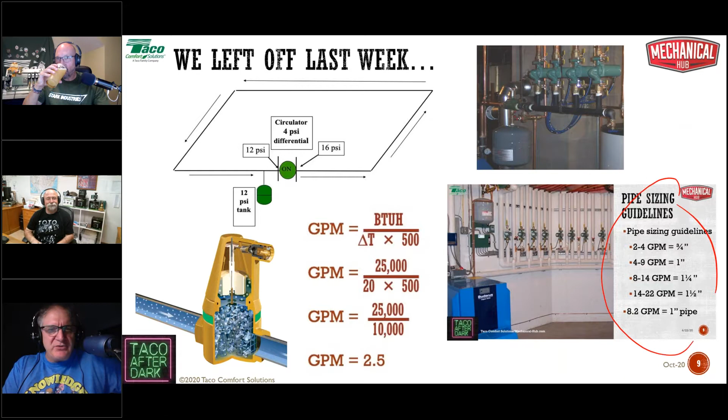So that's where we left off last week. Tonight we're going to start down the journey of circulator selection. A lot of folks look at this and say, well, I just use a 3-speed. Okay great, what speed do you usually set it at? Well, I usually set it to high, contractor no-callback mode. Well then you don't have a 3-speed pump - you're putting the biggest possible pump you can within that selection, and it may quote unquote work, meaning people aren't freezing to death, but there's a whole boatload of other things going on here.

So those are the things we're going to talk about tonight. We're going to talk about different types of circulators. We're also going to start the discussion that continues into the next couple weeks about variable speed circulators. I've heard the story: don't worry about circulators, just throw a variable speed in there, it'll be fine, these things are magic, these things take the thinking out of it. Well, we're going to poke a few holes into that hornet's nest as well next week.

So let's get started on circulator selection and the whole thing about pump curves, shall we? First things first, we call these things pumps, right? Everybody calls them a pump. We're a pump manufacturer, we're a pump company, these things are pumps, we need a pump, what's the right pump, blah blah blah. Well, we're going to use that word because it's easy and convenient and we're used to it, but it's not a pump, it's a circulator, and there's a difference.

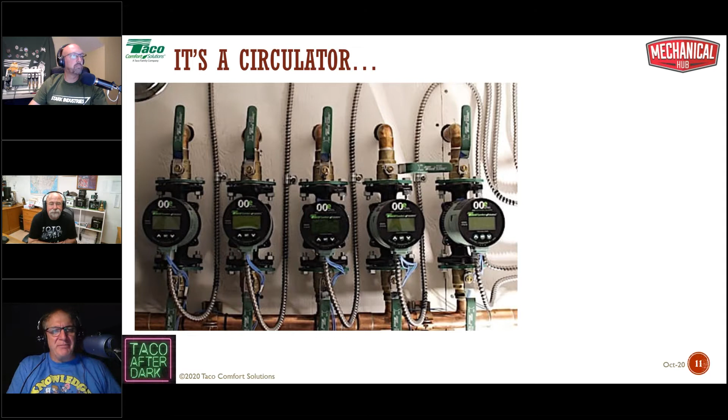Now a pump is more like a well pump, right? We are lifting water up out of the well into a pressurized tank. A circulator actually does a lot less work - a circulator doesn't pump, a circulator circulates, right? So it's not a pump, it's a circulator. In fact, maybe a better name for it would be to call it a pressure differential machine - its job is to create a pressure differential within the system, and then Mother Nature takes over. High pressure goes to low pressure. The trick is we need to get a circulator that creates enough of a pressure differential to create enough flow.

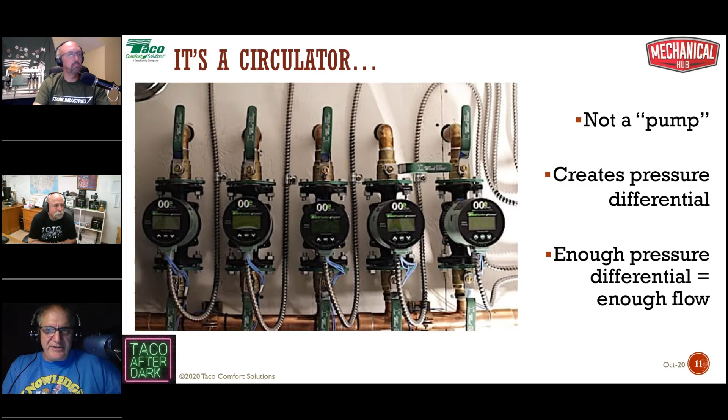To deliver the BTUs we need under design conditions. Remember that flow is GPM: GPM equals BTUH divided by delta T times 500. It starts to come together a little bit. So we need a circulator that's big enough without being ridiculously oversized. All right, so that's the challenge that we face.

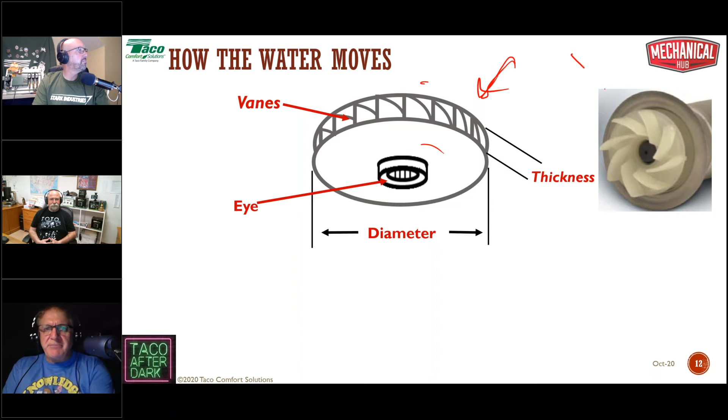How does the water move? How does one of these things work? Well, you've got the circulator, the gazinta side and the gazouta side, and inside that volute casing is this thing, an impeller. There's an artist's rendition of a closed vaned impeller right here because there's plastic on both sides. And over here is a picture of a standard efficiency 007 impeller, which is an open-faced or open-vaned impeller. They have different jobs, they do different things, but they work in essentially the same way.

The water is going to enter the impeller through the eye. It comes in the gazinta side, and there's a hump on the volute. What happens is that hump redirects the water 90 degrees, so it enters the eye of the impeller. Now this impeller is spinning at a certain RPM, and the water enters the eye.

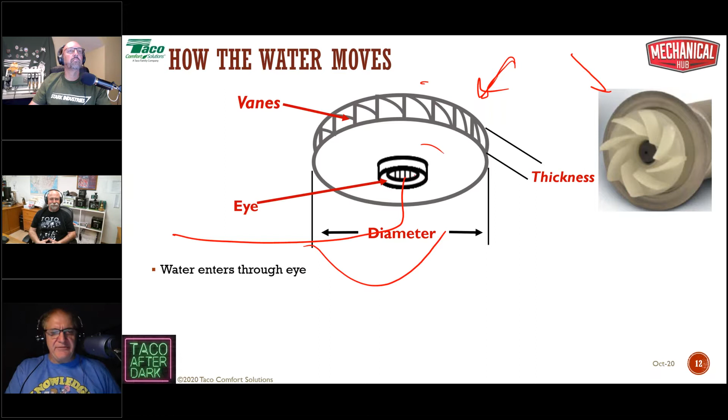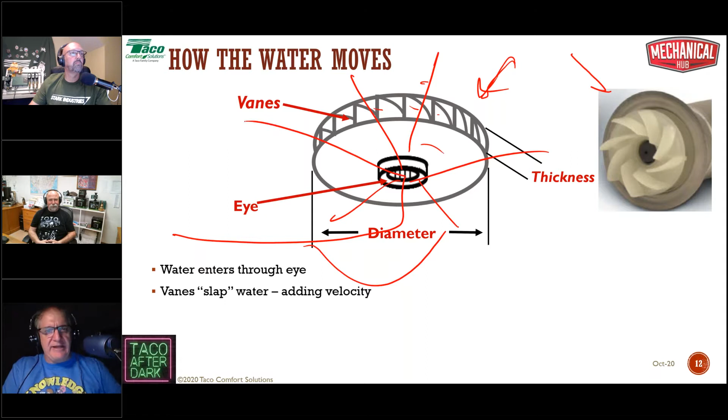Now these vanes you see in here will actually slap and fling the water from the inside out, in a 360-degree pattern, adding velocity to that fluid. The discharge side, which is a narrower passageway, turns that velocity into pressure. Kind of like if you had a hose and you put your thumb over a little part of it, that increases the velocity and pressure on a hose. Well, this is kind of the same thing, maybe a little different. That discharge side, that narrowing passageway, turns that velocity into pressure and creates the pressure differential.

Now a couple things about impellers. We're concerned about the diameter, how big across it is, as well as the thickness. The thicker the impeller, the more room there is for water. So at a given RPM, a thicker impeller will create more flow, it will move more gallons per minute at a given RPM than a thinner one will.

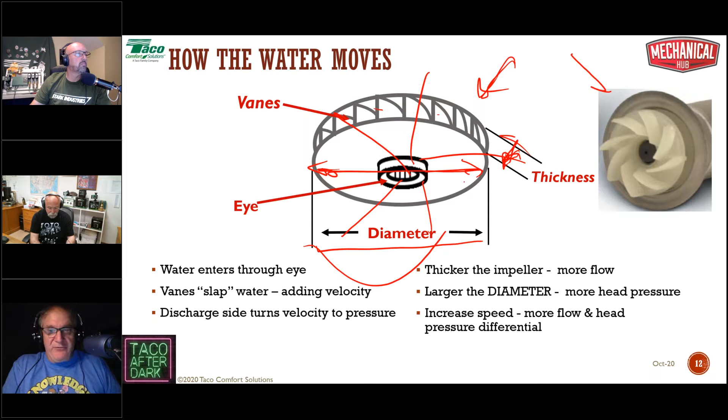In terms of diameter, the larger the diameter, the bigger across it is, the longer the fling at a given RPM, meaning flinging the water from the inside out, the more head pressure differential the circulator can create. So the thicker the impeller, the more gallons per minute; the larger the diameter, the bigger around it is, the more head pressure differential it can create. It could be a higher head pump at a given RPM. And one thing about RPM, if we increase the speed, we get more of both flow and head pressure differential.

So a 3-speed pump, simply, if you've got a pump curve here at low speed and you turn it to medium speed, it jumps up, it stays the exact same shape. It just jumps up a little bit, and you put it into high speed, it jumps up a little bit more. That's just changing the RPM. It doesn't change the shape, doesn't change the style of pump or the characteristics of the circulator. It simply gives you more of whatever it was giving you before.

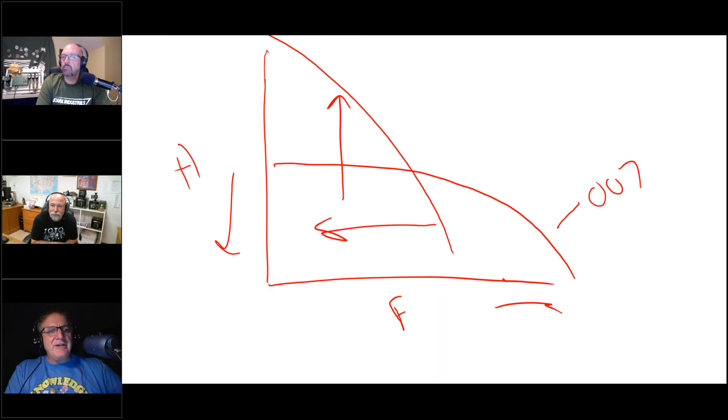Now the TACO 008 is going to have a pump performance curve that looks like that. It's a lower flow, by comparison, but a higher head circulator. Lower flow, higher head. I have a pop quiz for you, please type in your answer.

Which of these circulators, the 007 or the 008, do you think has the higher horsepower motor? The high flow, low head circulator or the low flow, high head circulator? That's a good question, I'd like to find out where you're at here. Which one has the higher horsepower motor?

You know what? They are in fact the same. They're like a 1/25th horsepower motor. They're not, it's not a big motor, 1/25th horsepower motor.

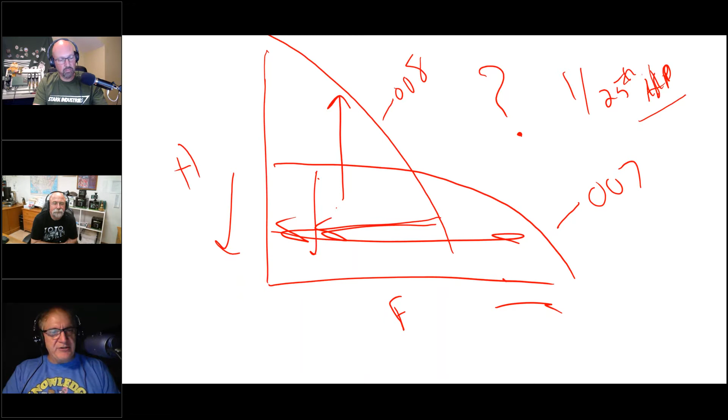The difference in the circulator performance is in the impeller. Remember we told you about the shapes of the impeller. The 007 is a high flow pump, so the impeller is going to be fairly thick, relatively speaking, but it's a low head circulator, so it's not going to be that big around. The 008, being a lower flow circulator, is going to have a thinner impeller, but since it's high head, it's going to be bigger around. So they're going to be going at the same RPM. At the same RPM, the 008 with that impeller is going to provide less flow, but more head pressure differential. The 007, more flow, but less head pressure differential.

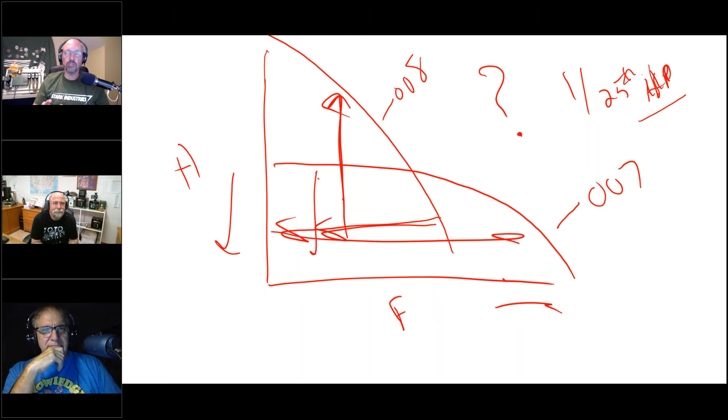So they again look the same on the outside. The cover plate's going to be different because it's going to show you a different model number. But remember, they're not interchangeable. So you can't take parts out of one and put them into another, because also the casing or the volute that they go into aren't the same either. So there's different tolerances that you have in there. Just so you know, they may look the same, but they are totally two different circulators. The machining is different, etc.

The motor's the same, but the cartridge and the machining and the casing are completely different, to create the different types of performance.

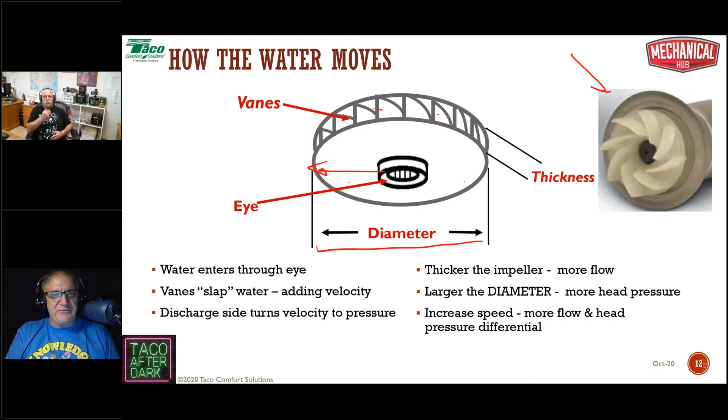Now we're going to get into when you might use a 007, when you might use a 008. Really, a 008's pump curve is kind of like the high speed curve on your typical 3-speed pump, whether it's a Taco 0015 standard efficiency, the Grundfos 1558, B&G NRF 22, pick your favorite flavor. They're all very much the same basic pump performance curves, but they all have that lower flow, higher head, steeper curve, which makes it a very good pump for specific applications. All righty, very good, very good.

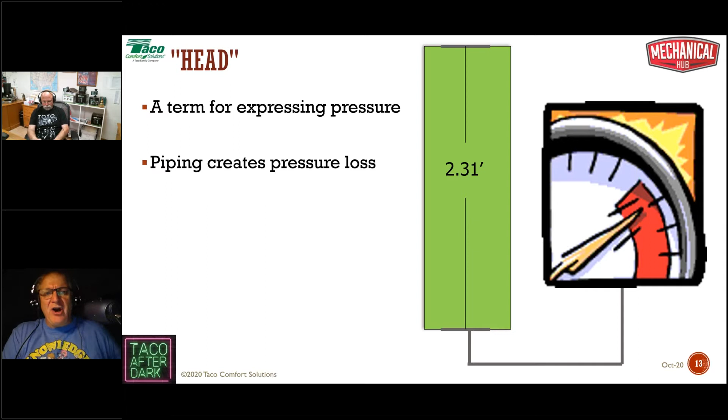Let's talk about head for a minute. Head in our world is a term for expressing pressure, or in the case of circulators, head pressure differential. So head in this case is a term for expressing pressure. We talked about this last week, that a column of water 2.31 feet high will have a gauge pressure down at the bottom of 1 psi. So 2.31 feet of head loss is like saying we have 1 psi worth of pressure loss. It's the same thing, only different, just expressed in different terms.

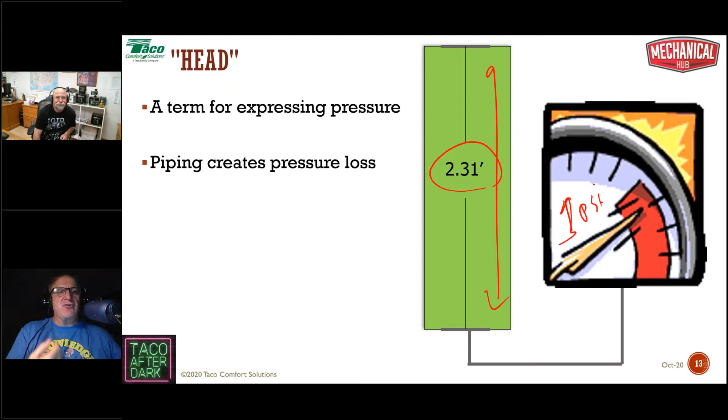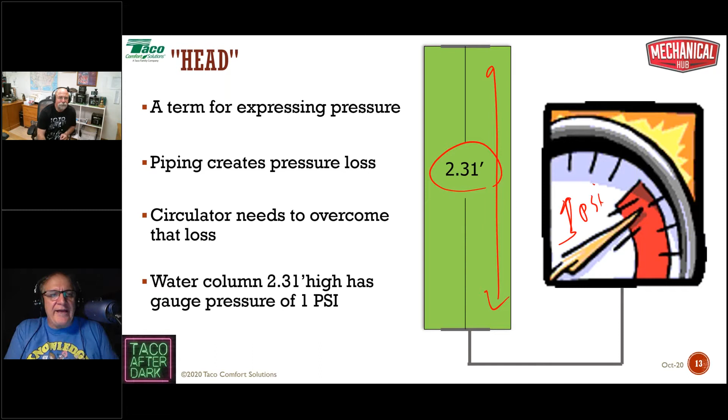Now, the pressure loss that we're going to experience in the system comes from the piping and all of the components. Water's rubbing up against the side of the pipe, it's ramming into fittings, it's going through zone valves and things like that. All of those things create pressure loss or friction loss, and the circulator has to overcome that pressure loss. That's what the word head refers to. And again, 2.31 feet of head loss is equal to 1 psi of pressure loss if you're looking at pressure gauges. Now, other ways of looking at head, we have 3 different kinds of head that we're talking about in hydronics.

The first is static head, or static fill pressure, another way of looking at it. That's the pressure you need to fill the system to its highest point, keeping it filled and pressurized with a little bit left over. That's typically the 12 psi that we discussed last week. There's friction head, or friction pressure loss. That's what's going on in the piping system. As the water goes through the piping system, that piping imparts friction loss on the fluid, resulting in pressure loss. That's what we have to overcome.

All right, we have to figure that out and overcome that with the circulator. Then there's pump head or circulator head—that's the pressure differential the circulator is capable of producing, and we'll show you that in our pump performance curve charts.

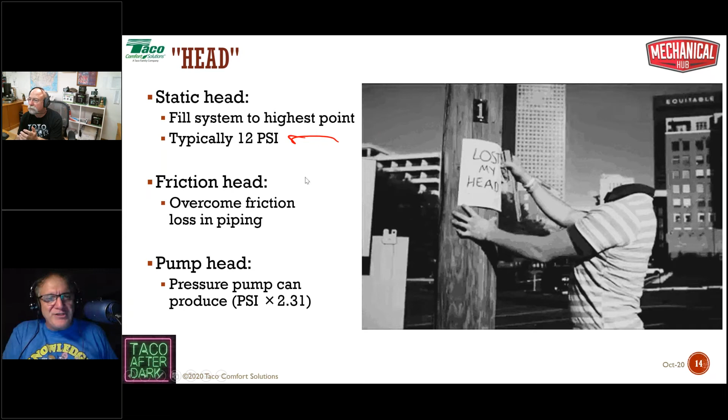That outlines what the circulator can in fact do. Now we want to make sure that what the circulator can do meets or just slightly exceeds the friction head we're encountering in the system. Let me know if that makes sense, because there's a lot of moving parts here. But these are the 3 types of head we typically deal with.

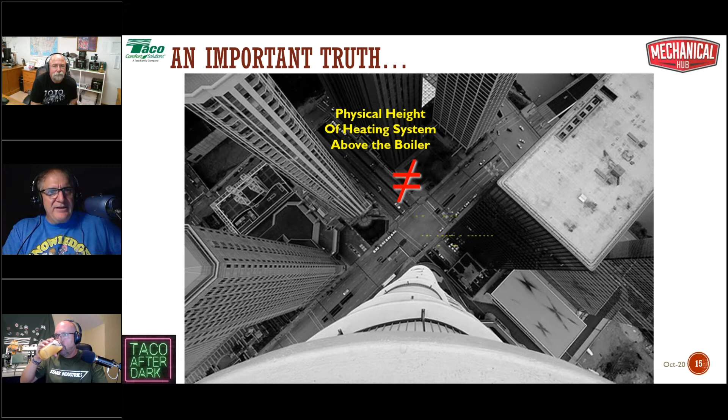Now, here's an important truth. Most of us are pretty clear on this, but this question does come up more often than you'd think: the physical height of the heating system above the boiler has nothing, nada, nothing to do with the required head pressure of the pump in feet of head.

Feet of head is an unfortunate term, because we often look at it and think feet of height. We think, I've got to pump that water all the way up to the 4th floor, I need a high head pump, I've got to pump it all the way up there, man. Well, no, you don't. They have nothing to do with one another.

Getting the system filled and pressurized up to its highest point, that's your static head—that's the fill pressure when you initially fill the system. The entire piping circuit is filled and pressurized with water, so when the circulator comes on, it doesn't have to lift the water up to the 3rd or 4th floor. It's already there. It's not an open system, it's a closed system.

Guys also ask, well, what about the weight of the water, don't I have to lift that? No, you don't, because it's a closed loop, and I don't have to lift the weight of the water because the same amount of water is coming back down the other side on the return. That's why circulators do so much less work than well pumps—all it has to do is circulate within a closed loop system.

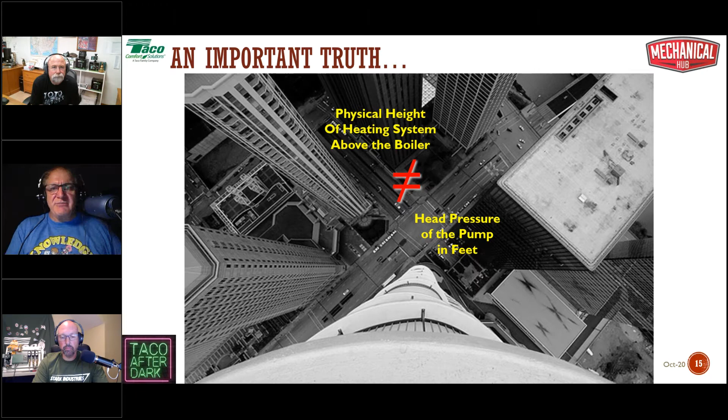So very important: the physical height of the heating system above the boiler has nothing to do with the head pressure of the pump in feet.

Can I add something? Sure, go right ahead. The same thing applies for potable water systems, and people forget that because in their mind a potable water system is an open system—oh, therefore I've got to go to the 3-story house. No, you don't, John. It's because it's still a closed system, and they start oversizing those pumps. We're mostly talking about closed loop heating and cooling, but it applies to domestic water systems too.

So when you're doing domestic hot water recirculation, don't start adding the height of the building just because it's potable water. Go ahead, John. You're right, you're absolutely right—it's exactly the same process. It's friction loss through the piping. We don't have to lift or anything like that.

Very good point. Maybe the best way in both instances to think of this is to think of the circulator as you would the motor on a Ferris wheel. If Rick, Dave, and I are in that little cart right there, the motor doesn't have to lift our heft up, because there's 3 other guys on the other side going right back down, just opposite us. So we don't have to lift.

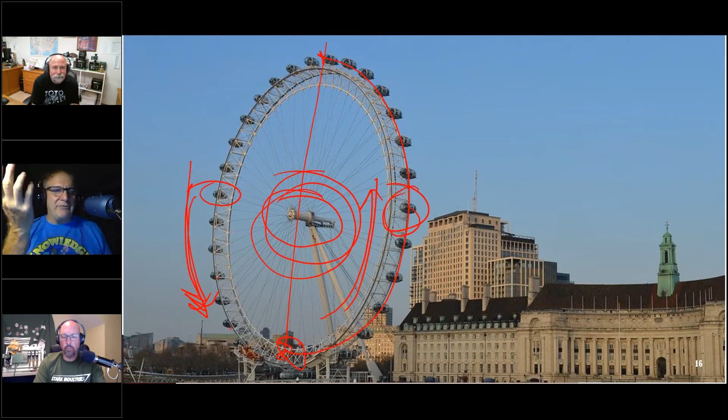So they don't just load cart after cart after cart. That would be crazy, it doesn't work that way. So think of your circulator like the motor on a Ferris wheel, and the water is just like all the different carts.

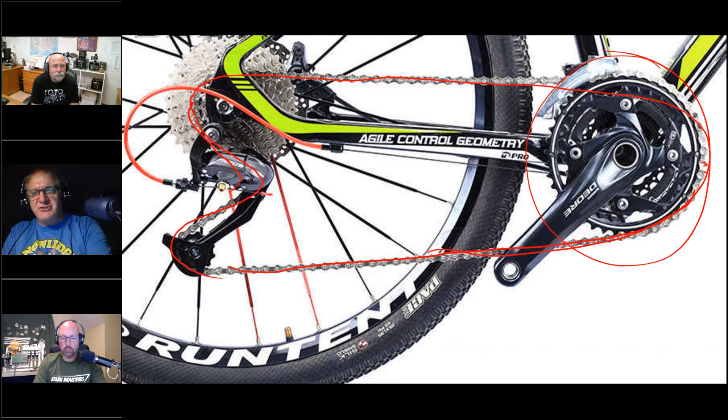Maybe a better visual is this. Think of the circulator as your bicycle pedal, and think of all the water in the system as the bicycle chain. When you pedal the bicycle, every link in that chain moves at exactly the same time, at exactly the same speed. I start pedaling here, this chain starts moving just like this chain. Same thing within a hydronic system. The minute the circulator comes on, this water starts moving, but so does this water and all of this water, and it moves at exactly the same speed. Yeah, just a good visual.

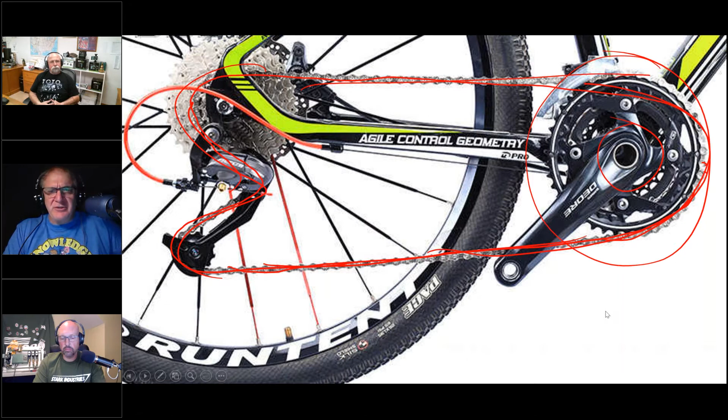All righty, how are we doing? Any questions out there, boys and girls? How are we doing out there? None at this point. All right, very good. No snow in Nova Scotia yet, right? Make sure you pedal at 85 to 100 RPM. Yes, Jim, yes, we got to pedal in a hurry.

When we look at Taco's fixed speed circulators, we got a boatload of them. And if you were to put them all on one pump curve chart, it would look ridiculous because there's so much stuff, and it would be virtually unusable. So we like to break them up into families.

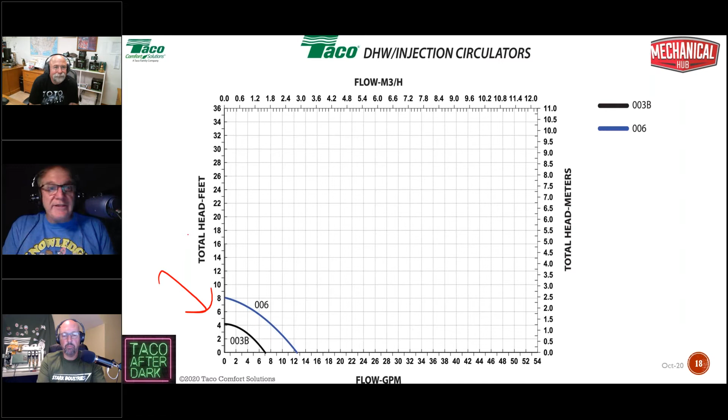First we have the 003 and the 006. They're little circulators, low flow, low head, not a lot of oomph to them. These primarily are your domestic hot water recirculation pumps because those don't require a whole lot of pump in most residential applications. It doesn't require much flow and there's not a whole lot of head loss to overcome. So those are the little ones, the 006, 003, 003B. 003B is bronze, 006 can be had in stainless steel or cast iron for heating applications. We see them a lot of times - these were used for variable speed injection mixing back when we did a lot more of that than we do today. A small pump does a lot of work in an injection mixing situation.

Then we have our flat curve circulators - again, flat relatively speaking, they're high flow and relatively low head, the 005 and 007. The 007, of course, is the workhorse. The 0010 is kind of a B&G 100 replacement in many cases. And then for even bigger applications, we have the 0012. High flow, low head, flat curve - they work outstanding in most zone pumping applications, and particularly flat curve pumps are zone valve pumps. If you're using a steep curve pump in a zone valve application, you should probably rethink that, and we'll explain that in the coming weeks. But flat curve pumps and zone valves go together like cake and ice cream.

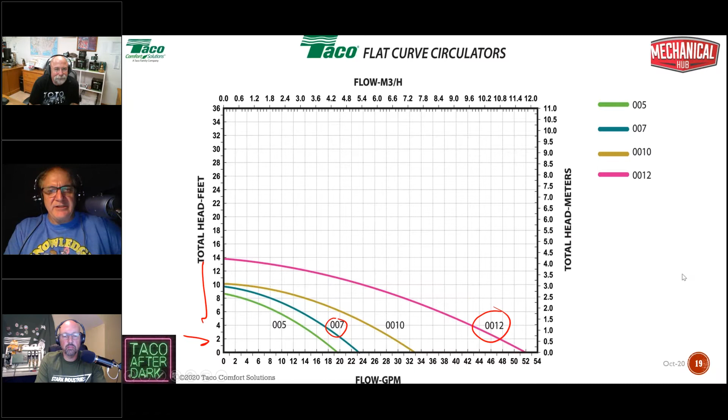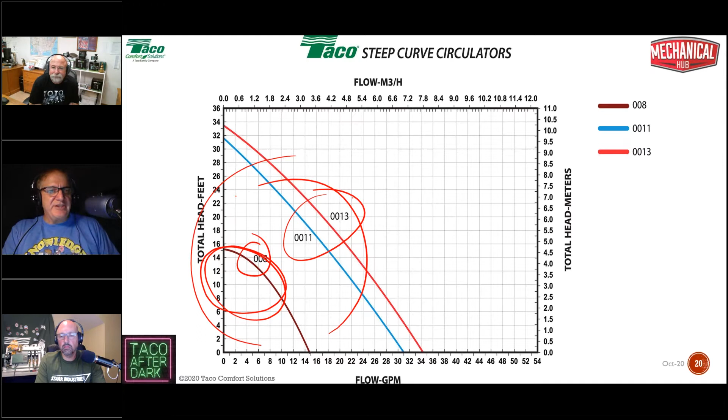Steep curve pumps and zone valves go together like tuna fish and ice cream - in other words, not very well. But we'll get into all of that in upcoming sessions. Our steep curve pumps, of course, we have the 008, as we mentioned earlier, and then its big brothers, the 0011 and the 0013. Again, radiant floor heating kind of lives right in here - that's a great application for a steep curve pump. These guys - snow melting, heat exchangers. A lot of times they're used on boiler pumps for larger ModCon boilers. You'll see them as pumps for indirects as well in many cases where you need a lot of recovery, and there's a high head loss heat exchanger there. So that's where you'll see the larger steep curve pumps.

We have the red-headed stepchildren, the specialty circulators that don't really fit anywhere. The 0014, used a lot - it's a very common pump, but it's not really steep, it's not really flat, it's kind of 'fleep' if you will. But then we have the double black diamond, if you're a skier, the 009, which was originally conceived as a booster pump for drain-back solar systems. Drain-back solar systems is actually an open system, so there the height matters. So there's a high head pump right there.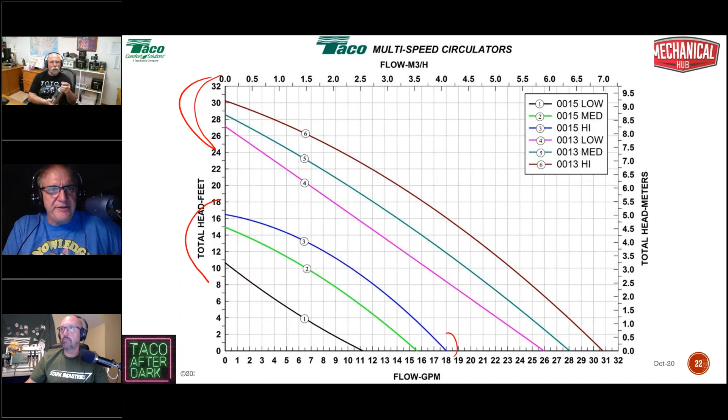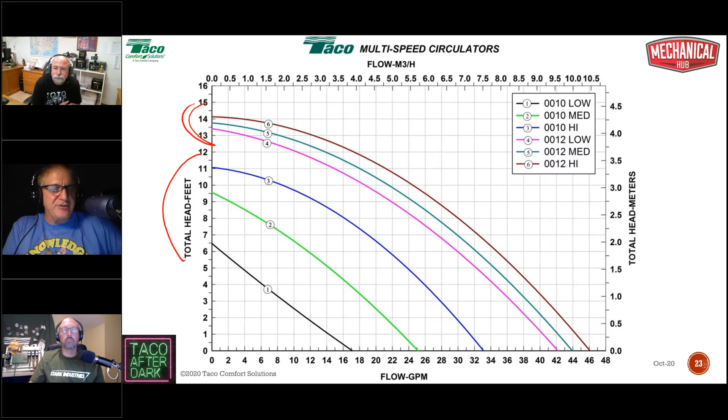We also have 2 flat curve pumps, and they don't really look flat here, but that's just because of scale. We have the 0010 flat curve pump, which is really a great service pump for those B&G 100 types of applications. And then the 0012 3-speed, again, 3 speeds for higher flow rates and higher head losses for larger type of systems. So we keep you covered there.

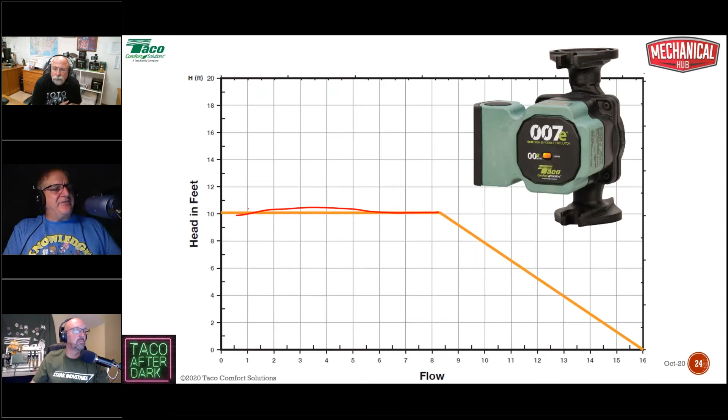ECM, we got a boatload of ECM circulators. I'll just cover 2 here real quickly. The 007 ECM variable speed circulator, the 007E, kind of the ultimate flat curve circulator, really good for zone valve applications. And if you like to use 3-speed standard efficiency circulators, you'll love the 0015E3, which is a 3-setting variable speed ECM circulator. This actually is a great zone valve pump as well. So that's kind of the family of circulators that we're talking about here, the different families of circulators.

Again, imagine if we tried to put that all in one chart, you'd lose your mind. Okay, so it's as wide of a range of circulators as you'll find in the hydronics industry.

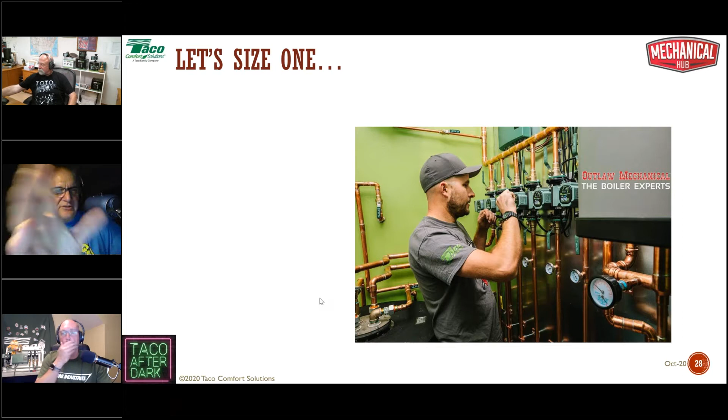So let's take a look at it. All righty, so here's the formula. Here's the process. Let's look at it this way. Here's the process for sizing a circulator. All right, we're going to do 1 zone of fin tube baseboard. Okay, and it really doesn't matter, it can be pretty much anything, but we're going to do 1 zone of fin tube baseboard. And this zone of fin tube baseboard has 30,000 BTUs on it.

It's a big honking zone.

All right, we did the heat loss. We didn't measure the baseboard and say 30,000. We actually did the heat loss of the rooms in this zone, and that heat loss came up to 30,000 BTUs.

We're designing the system to a delta T of 20, meaning the water goes out at 180, comes back at 160, for an average of 170. And in this example, we're going to use 100% water.

So remember, GPM equals BTUH divided by delta T times 500. So we put in what we know: 30,000 divided by 20 times 500. 20 times 500 is 10,000. To find the required flow rate for design conditions, 30,000 divided by 10,000 gives us a required flow rate of 3 gallons per minute.

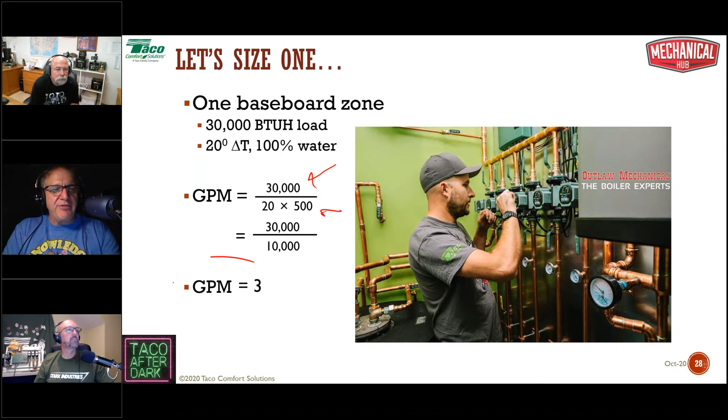So my circulator, let's say it's this circulator right here, that circulator is going to have to give me 3 gallons per minute of flow under design conditions. Now, 3 gallons a minute ain't a lot, but we know that's what we need.

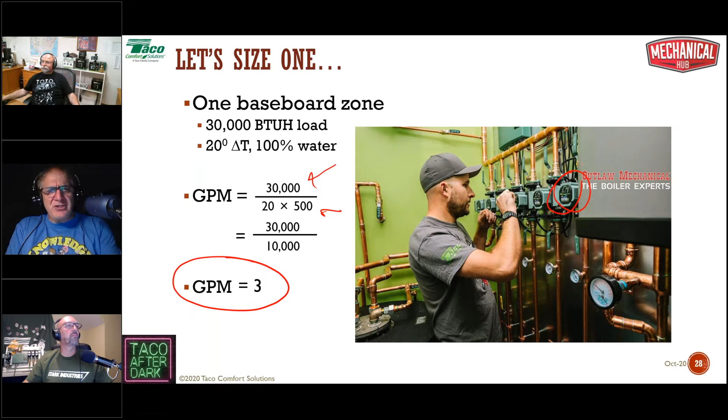Now we have to figure out the head loss. What is the head loss of that piping circuit so we can finish the job of selecting the circulator? And again, if it was any of these other things you mentioned earlier, heat pump or whatever, we need to know the pressure loss through all of the different components at the specific flow rate, because that does matter. But let's just look at this as a basic piping circuit.

The first thing we're going to do is the estimating way. This is your 4 o'clock Friday afternoon, I got to put a pump in here, what do I do? So this is a way to estimate head loss. This formula we're going to show you is wicked easy and wicked safe. There's a lot of fudge built into this that you'll never be undersized, provided you pipe size properly for the flow. But let's estimate our head loss.

So the first step is to measure the run as best you can. Now, if you're replacing a pump, they're not going to give you free rein with a sawzall to hack up the house just to count the pipe. In this case, you're going to have to estimate the length as best you can.

But we need to know the run, and the run is going to be from the Gazouta side of the circulator all the way back through the system to the Gazinda side of the circulator. That's the run we're talking about.

And don't spend a lot of time doing it. If it's baseboard, it's perimeter heat, you're done. What's the length and width of the house times 2 for each side? Call it a day, done.

It should never be 83.5 feet. Exactly. You might look at the boiler and say, okay, first we're going up 5 feet and over 5 feet, that's 10 feet. Then we're going to go down 40 feet, that's 50 feet. Over 20, that's 70 feet. Back 50 feet, that's 120. Over 10, that's 130. Down 10, that's 140. Call it good.

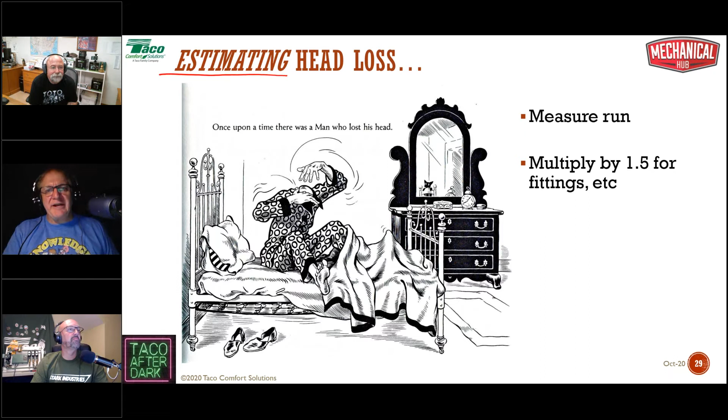All right, so we measure the run, and then we have to factor in fittings and stuff, because we can't count those. Fittings have pressure loss that's equivalent to lengths of pipe. So we multiply the run by 1.5, adding 50% to account for fittings and stuff that's in the way. That gives us our total developed or total equivalent length.

Now, to estimate the head loss, we multiply that number by 0.04. That represents 4 feet of head for every 100 feet of straight, properly sized pipe at the maximum flow rate for that size of pipe. Remember back to last week when we sized pipe? So we're estimating the highest possible head that could be in that system at the highest flow rate. That's what we're estimating.

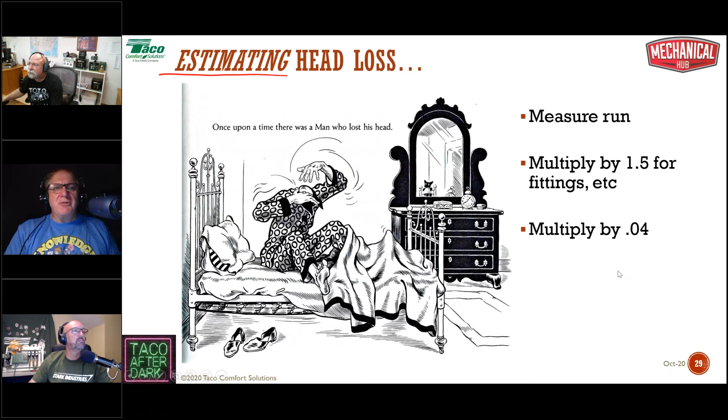So let's do one. Measure the run, multiply by 1.5, multiply by 0.04. Here's our zone, and we measure the total run to be about 135 feet. First step, multiply by 1.5. That gives us 203 feet, our total developed or total equivalent length. Multiply that by 0.04, and that gives us just about 8 feet of head.

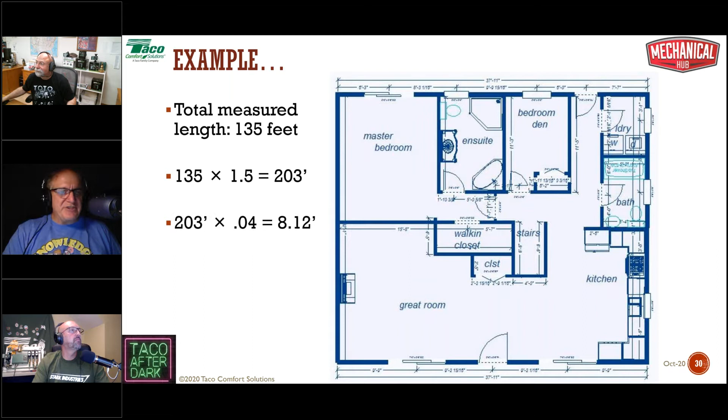All right, 8 feet of head. So when I go to look for a circulator, I'm going to need one that gives me 3 gallons per minute worth of flow while overcoming 8 feet of head. All right, very, very good.

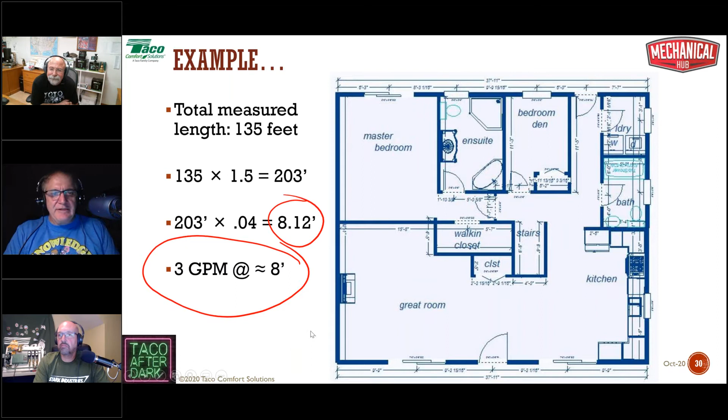So what does that mean for a circulator? Well, let's pick one. Here's one of those charts where we got every circulator we make on one chart, which is just nuts, but here it is. We're using this for a purpose. Down below we have gallons per minute, and over here we have head. So 3 gallons a minute, 8 feet of head. Here's my requirement, right where that red dot is.

Now, taking a look at the red dot, what circulator would you choose? Type in, let's see what you have for thoughts. What circulator would you select of the ones shown here? All right, what do you got, people?

Carl, you're right, wouldn't it be easier to multiply by 0.06 and save a step? Yep, you certainly can. However, it's good to know how you arrived at 0.06.

005, if you can find one. You know where we're going with this, right? Most people are saying 005 and 007, and I think in either case you're going to be fine. The thing is, the 005 is in every sense the 007's kid brother, but it's also living proof that you guys don't buy on price. Another story for another day, but that's the point behind the 005.

Most people don't stock it. You find it at Grainger, catalog stores, things like that. They actually do buy a lot of 005s. But most folks will find the 007 is going to be the right combination of price and availability. The 005 actually winds up being more expensive simply because we don't make as many of them.

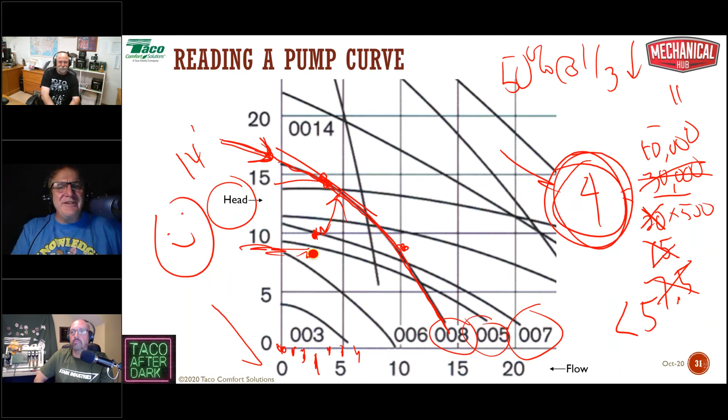Let's take a look at this, how we can even make this worse. What if we were to go with a 3-speed circulator? This is where I need to be. Personally, I'd be fine with low speed here. If this was me, I would use a 0015 and I'd put it at low speed right here.

But where do people set 3-speed pumps? We all know where people set 3-speed pumps. It's contractor no-callback mode. It's not medium, medium speed, nobody uses medium speed. That's for people with commitment issues. You go high, man, you go all the way.

If we went all the way here, put it on high speed, now I'm jamming at 5 gallons a minute and my delta T situation is just that much worse. Again, no one will ever freeze to death. This is where people look at me and say, that's insane, I put those things in and it works. Well, let's define works. Nobody's freezing to death and blaming me.

That's your first hurdle, all right. That's not the end of the job. You know, a handyman can do that. You're a professional, they're expecting a little bit more from you.

And sometimes they end up in low speed. They start off in low speed, right? You start off in low speed, you install it, you turn it on, it runs. You're like, okay, this is all pretty cool. You clean up all your tools. You're starting to walk out and you look at the circ and you're like, no, I'm going to turn it up. And you turn it up before you walk out of the house.

Yeah, nobody wants that phone call, man. Nobody wants that phone call. Exactly, and you don't want to take that walk back. It's like the walk of shame, you know. Okay, I go downstairs, and you walk downstairs and you go click, click. And is that the only thing you do? Heck no, right, you all of a sudden you start banging on pipes, making some noise.

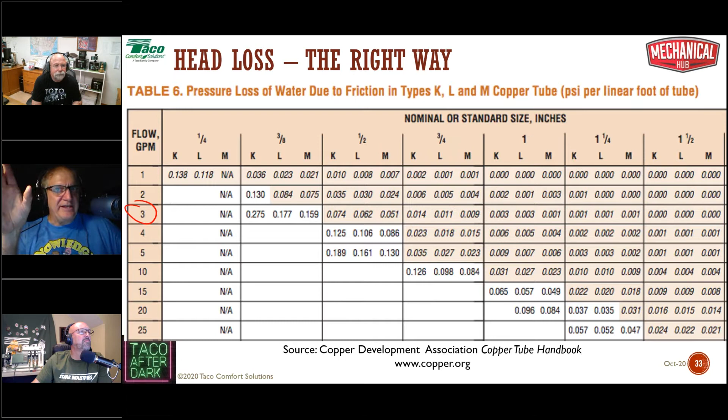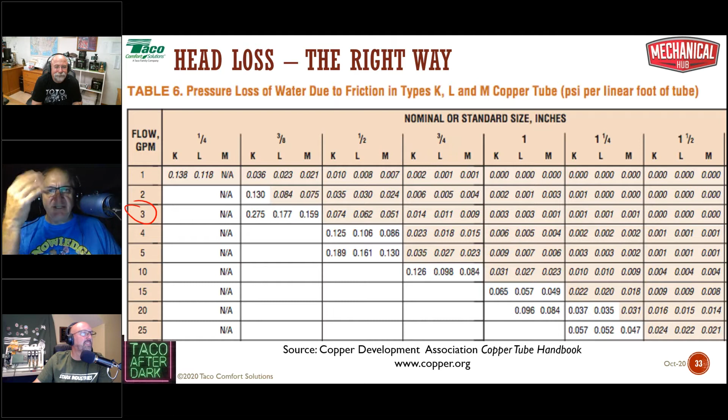This chart comes from the Copper Development Association's Copper Tube Handbook, maybe the most mind-numbingly boring book ever written, except for Table 6, which is a pressure loss chart of water due to friction in types K, L, and M copper tubing, and it gives you the pressure loss in PSI per foot of tube. Keep that in mind - it's PSI per foot of tube. So let's take a look.

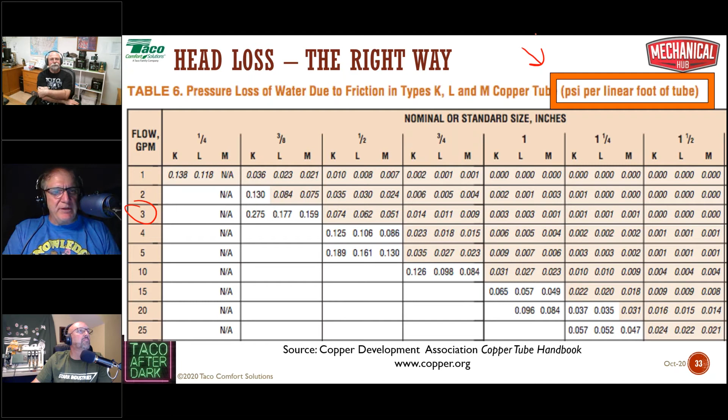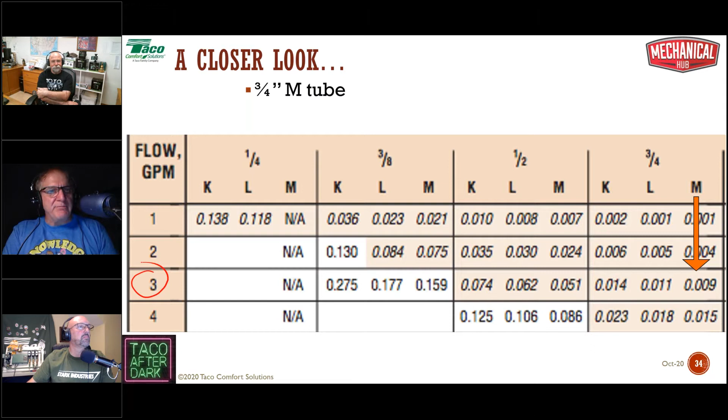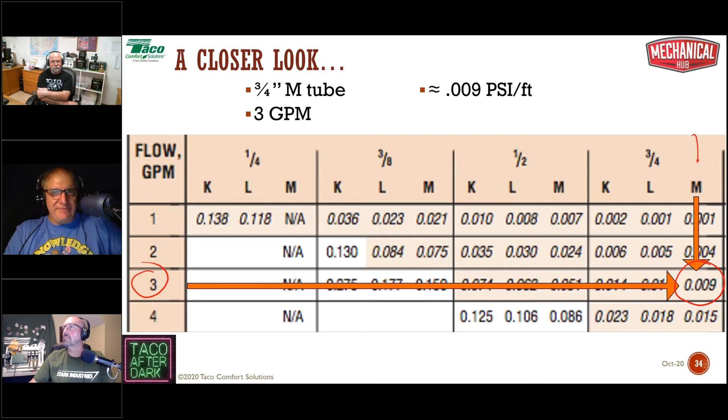We're looking at 3/4 inch type M copper. That's what we would use for 3 gallons per minute - that's the required pipe size for that required flow rate. So I find my 3 gallons a minute, I find 3/4 inch M, and I see that my pressure loss in PSI for 1 foot of pipe is 0.009. So it's 0.009 PSI worth of pressure loss per foot of pipe. Now I just got to figure out how long my run is.

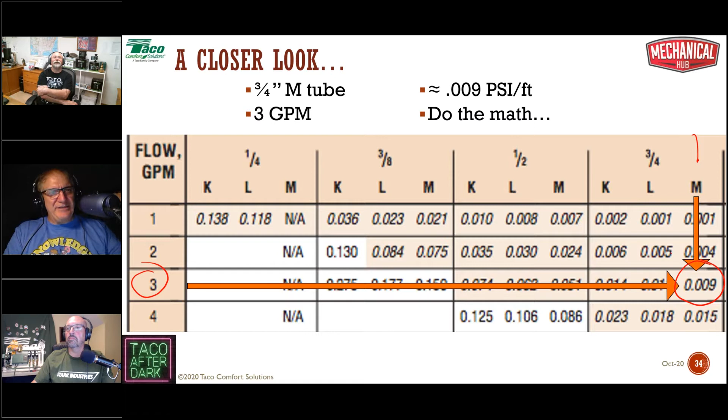Now I can use the 203 number I had earlier. That's a perfectly acceptable number in this example. If you really suffered through excessively rigid early toilet training and everything had to be just so, well then you can use this chart.

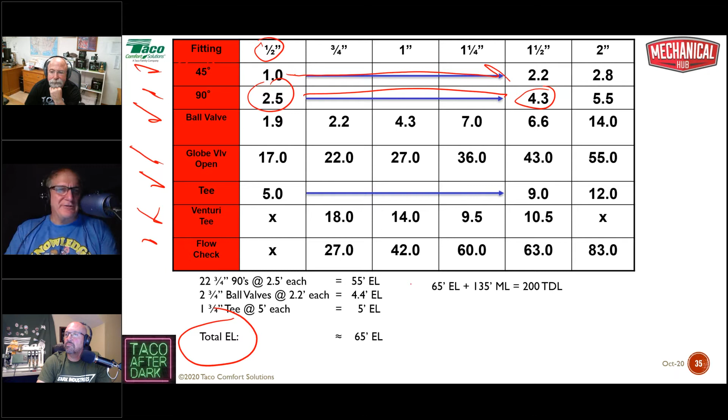So as an example, you'd count them up and see what the total equivalent length is of all of your fittings. In this case, 65 feet, to add it to the 135 we had for measured length, we come up with 200. Like I said, you could have used the 203 that we came up with earlier.

So 200 feet of pipe times 0.009 psi per foot of pipe gives us a pressure loss of 1.8 psi through that piping system. Now we already know how to convert psi into feet of head, right? We multiply it by 2.31. So 1.8 psi times 2.31 feet of head per psi, this is the real head loss, just over 4 feet of head. We estimated it at 8. It really is only 4.

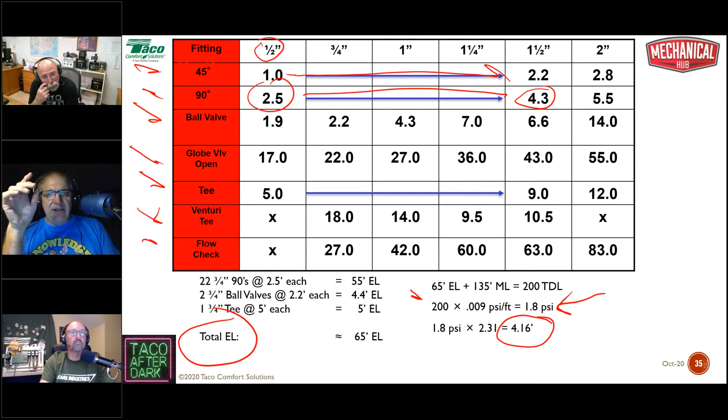So look at it like this: if the flow goes up 33% from 3 gallons a minute to 4 gallons a minute, the head's going to double. That's the mathematical relationship between flow and head. So what I really need is 3 gallons a minute at 4 feet of head. Looky-loo, that's down there. That's why I said low is just fine. Low is going to be more than enough here.

If I were to calculate out my system curve, here are the different operating points. Now in this case, again, I'm at almost 4 gallons a minute at low. I'm at almost 4 gallons a minute at low speed. So I'm still over pumping.

But if I went to high, if I said 135 feet, that's a long run, so it's 30,000 BTUs, man. I better make sure I get flow. Click, click, let's put it on high and get the hell out of here. Look at this, I'm at almost 6 gallons a minute. It's amazing—if I had ever saw delta T in double digits, I probably won't.

All right, this is the problem, people. We have a chronic overpumping problem in residential hydronics because of this. Chronic indeed. And just imagine the issues that tends to lead to.

First off, you've got systems that are never as efficient as they could or should be, especially the new high efficiency systems that people are expecting big numbers out of. Yeah, the combustion efficiency looks good, but they're not as fuel efficient as they could or should be, and not as efficient as customers are expecting, as we have learned over the years.

But we're short cycling things into an early grave. If you've had to replace an igniter, an ignition module, a blower motor, any kind of a spark ignition thing, any kind of a moving part in that boiler prematurely, it's not because they're using crappy components these days. It's because we've probably short cycled them into an early grave. That's what we're dealing with, and we've been doing it this way for decades.

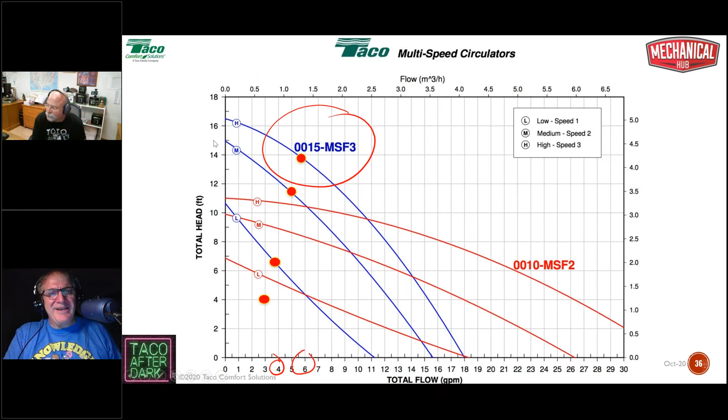So we started shoehorning these things in, and then we started seeing all these problems. What made the light bulbs come on was the advent of variable speed pumps, because then we realized it doesn't have to be this way. It doesn't have to be this way. So that's kind of the story about system curves and pump curves.

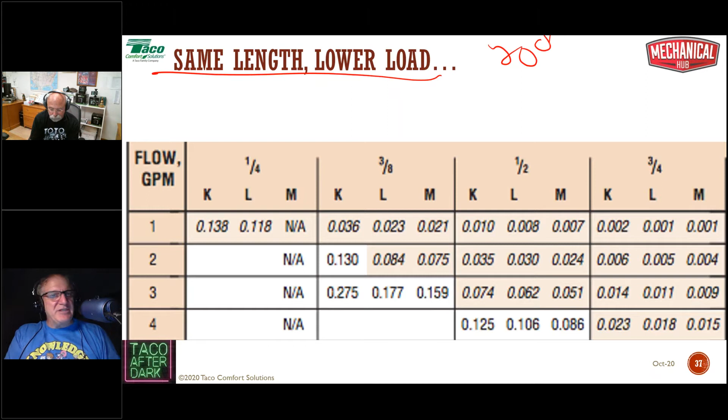But I want to show you just another curveball, man. What if we had the same length? We were still at 200 feet, all right, but it was a different zone—only 20,000 BTUs. Different zone, but it was the same length.

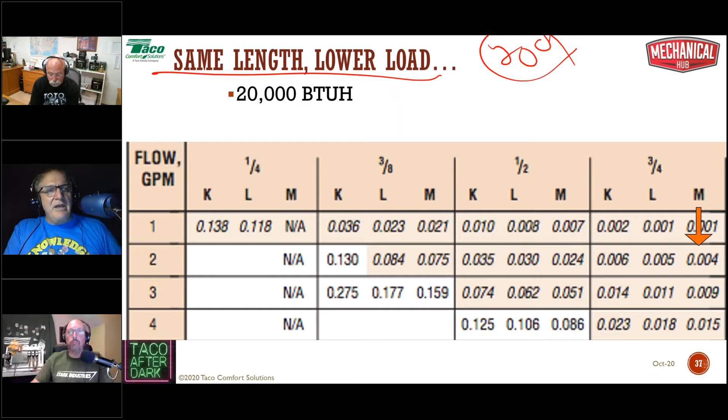If we had used our original method—measure the run, multiply by 1.5, multiply by 0.04—we would come up with 8 feet, because all that sees is length, right? But this is load now. 20,000 BTUs is only 2 gallons a minute. All right, so now dig this.

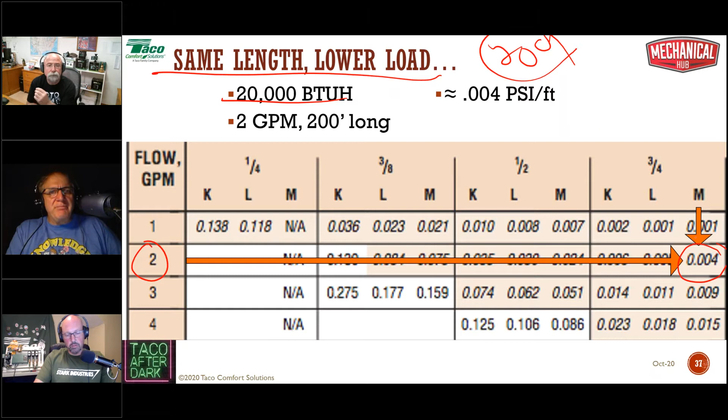Our pressure loss is 0.004 psi per foot of pipe. Again, it's less than half of what it was at 3 gallons per minute. So it's 0.004 psi per foot. This is very interesting, let's do a little math here: 0.8 psi—200 feet times 0.004 psi per foot—that's 0.8 of a psi.

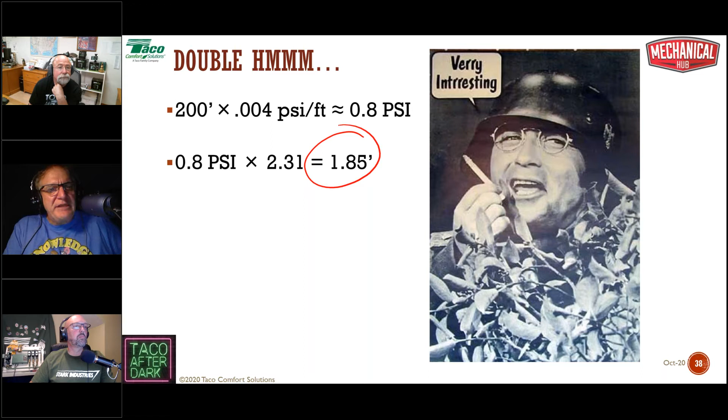We're talking about 1.85 feet of head. This is a 135-foot loop with fittings carrying 30,000 BTUs, or 20,000 BTUs in this example. It's less than 2 feet of head. Realistically, we're looking for 2 gallons a minute at 2 feet of head. You know what? We're never going to undersize that pump, because nobody makes a pump that would be undersized.

I'm going to have, in this case, 50% more flow than I need. So my best delta T is going to be about 12, 13 degrees in this system, and that's really not bad based on what you have. But we can do better.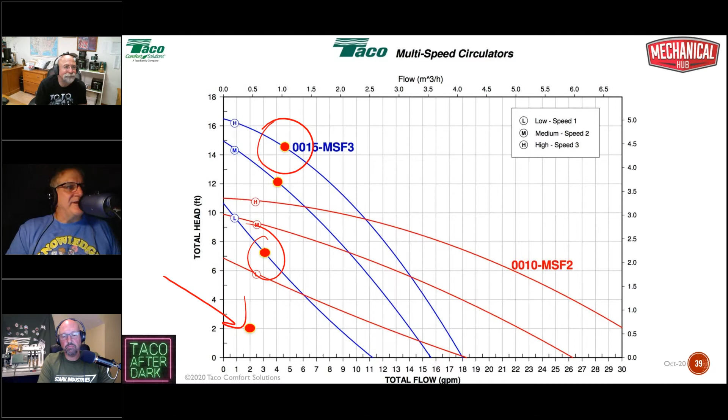We're not getting out of single digits, people. It's just not going to happen for delta T. Delta T is important. It's not just a design feature and a nice theoretical number. Delta T is important because it's an indicator of the health and performance of the system. The colder it gets, the delta T is going to get wider. The warmer it gets, the delta T is going to get lower because we're pumping at a fixed speed.

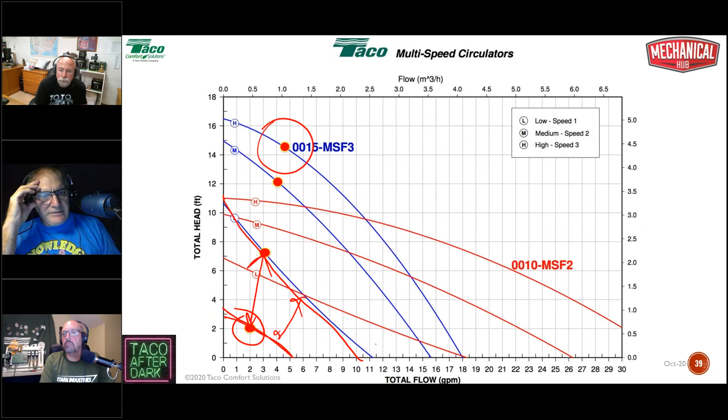But we want to keep that delta T as wide as possible for as much of the heating season as possible. That is your pump sizing goal. The way to achieve that is once you know your flow and head, pick a circulator whose performance curve is as close to, or equal to if possible. A little low might be okay, a little higher would be all right too. What you really want to do is eliminate as much white space on the pump curve chart as possible between your requirement and the curve you're using. That's your goal when we're talking about circulator sizing. Let me know if that makes sense to y'all, because that's kind of good stuff.

And it's time for our trivia answer. Conjunction junction, what's your function?

Question, just before we answer this, don't variable speed pumps help with the problem? Asked Shane Brown. To a degree. They don't magically cure it. You have to know what you're doing with variable speed pumps.

Shane, this is something Taco's been very adamant about - these things aren't magic. They're fantastic pieces of equipment, they do incredible things, but you got to know how to make the most out of them, because you could put a variable speed pump on that job and not help it at all, other than using less electricity, if you're not careful about what you're doing. So you certainly can help it. Again, the advent of variable speed circulators really opened up this whole world to us to be able to talk about it, because we can do better. Before, that was all we had, but we can do better.

So Howard Leggett mentions the VT2218 all day long. Yeah, and twice on Sunday. I agree with you, Howard - best pump out there. And that goes back to our conversation from last week about boiler sizing.

Right? We had modulating condensing boilers. Well, just put a modulating boiler in - not necessarily, it could be too big on its lowest firing rate. Same thing can happen with circulators too - we may not modulate to where it does anything whatsoever to the system except use less electricity. Except your modulating boiler may not be using less fuel - it's still sending out the same BTUs, and the house is still consuming the same amount of BTUs. You're just not seeing that percentage jump they should have seen going from, say, cast iron to condensing, if it ain't condensing.

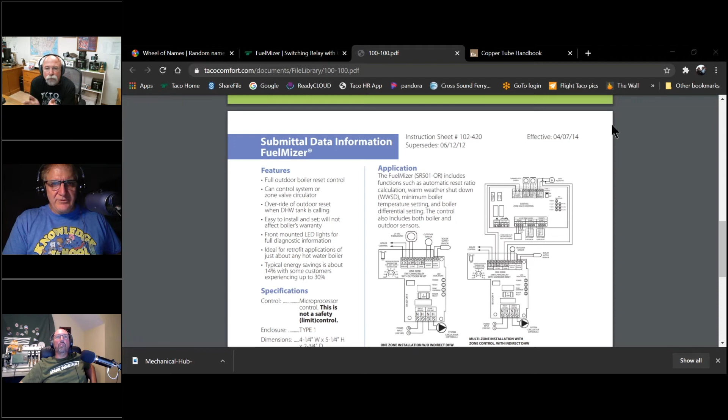I just want to, let's see here. There's the fuel miser. Okay, that was the fuel miser, but then I wanted to pull up this curve. Are we looking at the curve? Yep, just making sure. So we take a look at that, 13 gallons a minute, 2 foot of head, sitting right there. Okay, so you can see the mouse though, right?

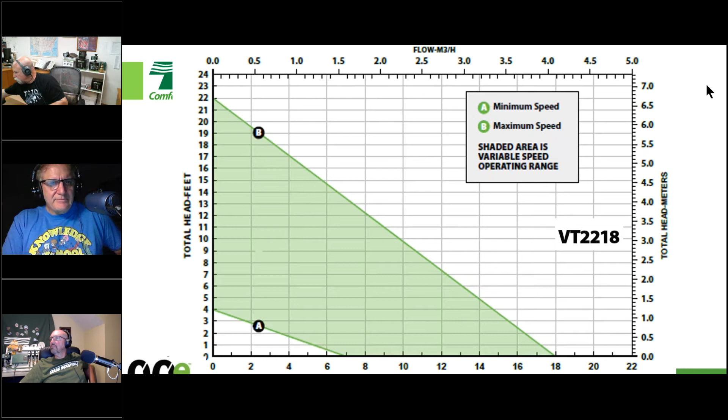Yeah, so you've got plenty of room to work with there, Howard. Definitely. Very cool, very cool. There's so many interesting things that we all learn. That's one of the great things about this, we all kind of learn together. So that's awesome.

And that's one thing to remember too about the VT2218, something we don't talk about very much because too many features gets confusing, but you can take it out of delta T mode and it's now a 4-speed pump. I remember doing a training class in Toronto with Jeff House many years ago, and I was asking the guys why do you use 3-speed pumps, because I was curious, and got a lot of different answers. But the best answer I got was the guy looked at me and said, because you don't make any 4-speeds. You made a 4-speed, I'd use that.

And I said, all right, well, we got one. That VT2218 could be four fixed speeds. It could also be a set point pump where you just use one sensor and the pump will vary its speed to maintain a fixed temperature in whatever you want to maintain a fixed temperature in, which is kind of cool. Mixing.

Yeah, I've used it on some small snowmelts like that. You're trying to maintain a temperature on the outlet side of a heat exchanger? Correct, right, without having to put in a mixing valve.

So if you don't have any mixing going out onto, making a small snowmelt, let's say it's a small patio or walkway, or steps coming into the house, you don't want to get too crazy with your controls or your mixing. You throw a heat exchanger on so you don't have to fill the boiler with antifreeze, and you put the VT pump on the boiler side, the fixed speed pump on the snowmelt side, but the temperature sensor from the VT goes onto the snowmelt side of the heat exchanger.

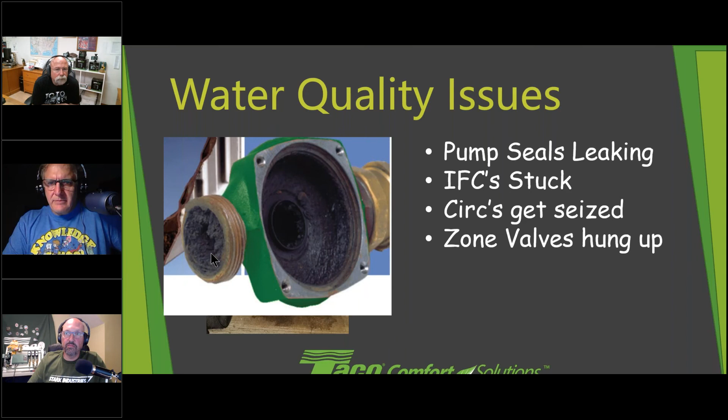Just to show you a couple of things to think about when you're looking at water quality - do you think you have an issue or not? A lot of times we don't pay attention to it. But if you see your pump seals - you're not going to see that in a 00 series, but you're going to see that in your 3-piece systems. You'll find your IFCs, circulators getting jammed up like this one here - that's a lot of jamming. Zone valves not closing is going to cause that also. Low water cutoffs, if they seem to be tripping prematurely, it's getting buildup on there.

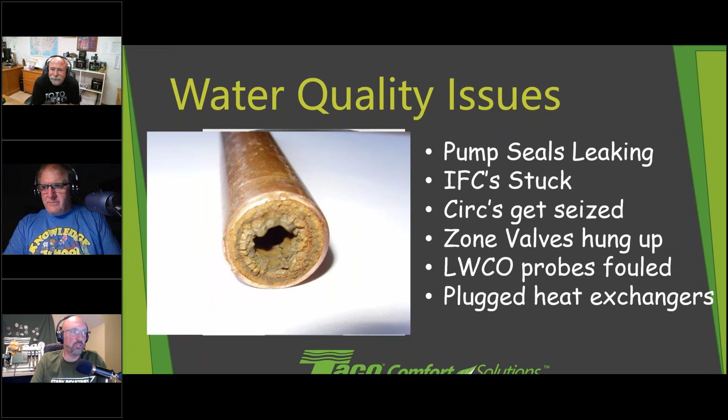And your heat exchangers - these are all pictures from job sites, all these things taken out of here. Some of them may be extremes when you start thinking about it, but it might need to be considered water quality. You might need to put some chemicals in there to treat it, but also try to get that stuff out - that's what the dirt separators are going to do for you, to try to grab that out. There's a lot of different sizes that we offer, and this black part down here at the bottom is the magnets.

When John said before, 13,000 Gauss - if anybody has touched one before, you guys got them right there, pull the magnets out. You showed them on the camera before.

If you've heard other conversations out there about the Gauss of the magnetic strength - I've been to plenty of trade shows, guys come walking over to our booth, the Taco booth, with their big magnet wand. Oh baby, look at that. They walk up to the circulator. Yeah, it's a new bracelet too. You pick up a circulator with the magnet.

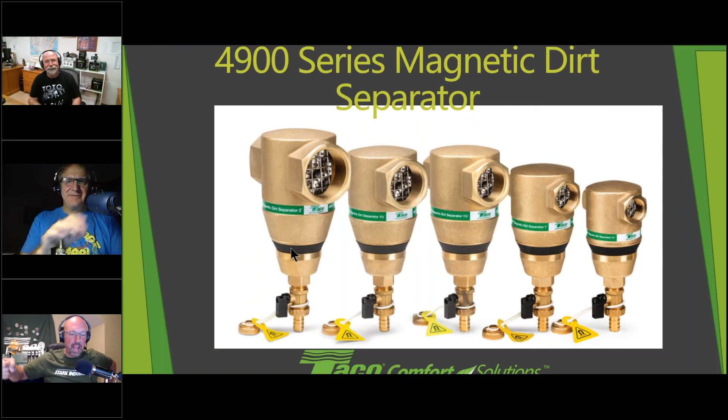So let me talk about what Gauss is for a second, in case you're curious. Anybody that's coming out with a magnetic dirt separator, we start talking about the Gauss to try to separate it from each other. Let's run the numbers - ours is 13,000 Gauss with these little watch batteries. The Fernox TF1, great piece of equipment, has a really strong magnet that picks up a circulator. The Adey MagnaClean, same thing - this big magnet, it's like 8 inches long, picks up a circulator with it. The Caleffi Dirt Mag 2600.

What is Gauss? Just so we're all on the same playing field, it has nothing to do with magnetic strength - it has to do with magnetic field strength, what they call flux density. Every time I say the word flux density in a training class, everybody goes back to thinking Back to the Future - yeah, the flux capacitor. Exactly, 1.21 gigawatts, right? That's right.

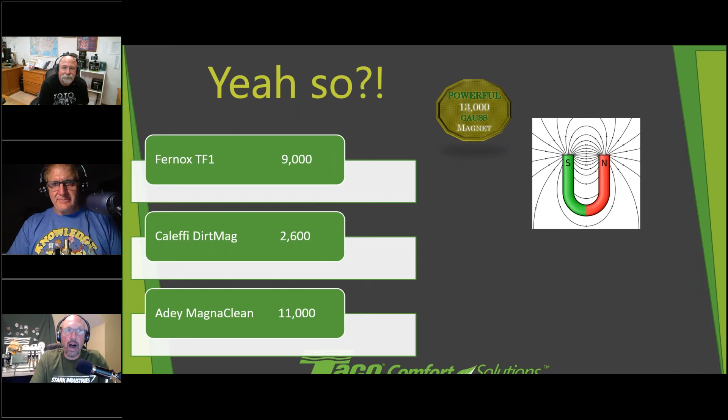So you see this U magnet here - the flux density there is quite dense because the north and south poles are opposite of each other, so the field strength is stronger. When you look at a bar magnet, the reason why you see the Fernox and the Adey at 9 and 11,000, which is higher - crazy because they can pick up a circulator with their magnet - is because they have a bar magnet in there. They have a really strong bar magnet to try to get these lines closer together, but when you do the north and south poles opposite of each other, that's when the density gets stronger.

So just so you have an idea of what it all means, when you're out there shopping for something, take a look at it and make your own decisions. It's going to work for your applications, for your projects and your job sites. So that's all I wanted to say about that.

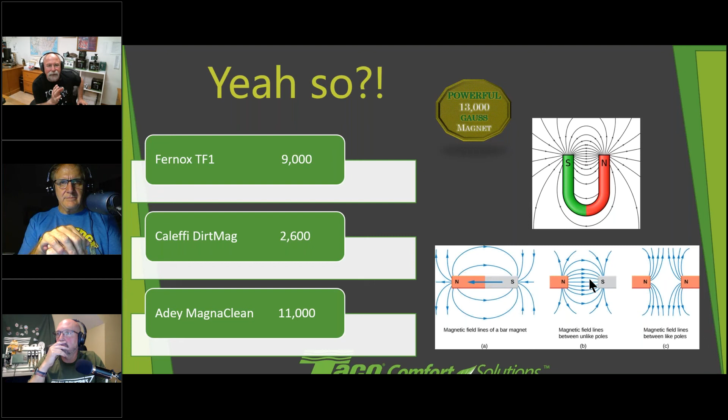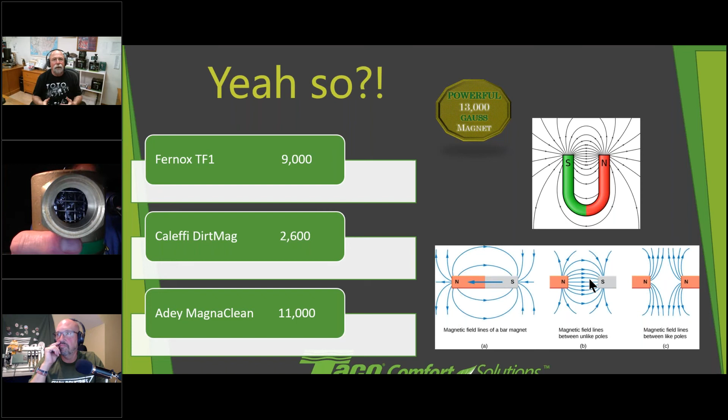I want to add to that, Dave. Dave's got a good point there, but our point is really not that our magnets do that good a job. It's more about the colliding of the particulate and the barrel size and getting the stuff to drop out, and then we pull the magnet, it pulls it in there. So it's more about how well a job we do with particulate dropping out of suspension, and then the magnet just merely holds on to it once we get it out. We do a really good job with those Pall rings, and nobody else has that technology in North America. So there you go.

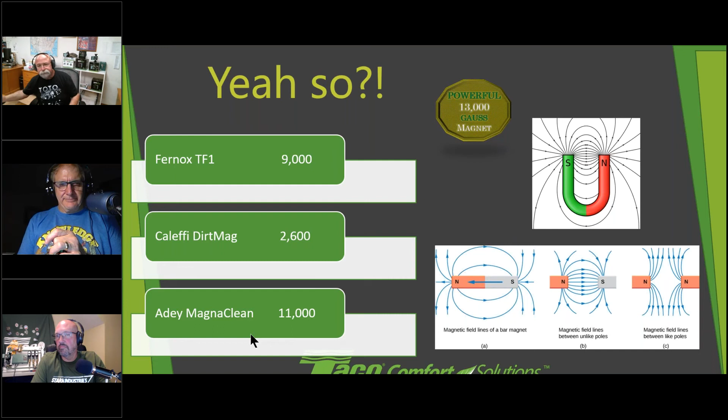Oh, and Richard McGrath found the Wikipedia page for Carl Friedrich Gauss. That's right. When we had to learn about this stuff and put the presentation together, I went to old Carl Friedrich's Wikipedia page and learned all about him.

So Wikipedia, you can get lost in it. I don't know if you guys have ever done that. You start chasing, you look up one thing and then you start chasing into all these different rabbit holes, 6 degrees of separation on how does Amy Adams relate to Carl Friedrich Gauss. There's a connection there, you just have to find it. And you forget why you went there in the first place, right? Exactly. But it's great for research. It's not always 100% accurate, but it sure makes for interesting reading.

How many people give them money? I have, for as much as I use Wikipedia, I've never donated. Anybody out there ever actually give them $20? It's probably worth doing for as much as I use Wikipedia. Yeah, amen. But then again, I also have to take half the stuff with a grain of salt because anybody can edit it. So that becomes a challenge too. So if you're reading something, it's like, well, is that really true or not? I'm not sure, just like everything on the web. I have to go find a couple of other websites to try to corroborate with the Wikipedia page just to make sure, more than one person saying the same thing at the same time.